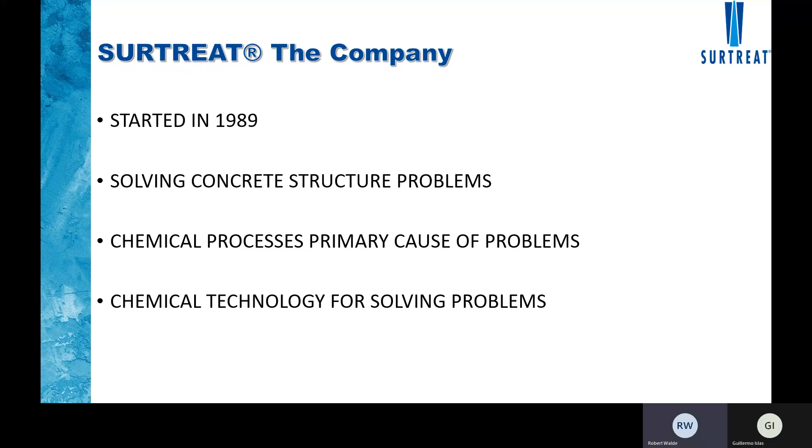So we realized that we needed to use chemical technology to solve these underlying problems and then incorporate the chemical solutions with the classic fixes, such as carbon fiber reinforcement, which we do with one of our associate companies, and even now the parent of Surtreat, Coordinated Systems Consulting, which is one of the leaders in the reinforcement of concrete using carbon fiber reinforced polymer mats.

We developed a concept called total performance system. What do we mean by that? That means that we do other things than just deliver product. What we do, we first take a look at the problem, as we see it normally in its physical form, cracks in the concrete falling off the surface, exposing rusty rebar. And we use this information to then dig deeper and determine what is the underlying cause of the damage. Is it alkali-silica reaction, rebar corrosion, freeze-thaw damage?

And to verify the degree and type of problem, we do testing. We're one of the only companies that actually does on-site testing as well as laboratory performance measurements. Just about all of our data on the performance of our products have been acquired on site where we're doing work on actual projects, measuring concrete strength, measuring the rate of corrosion on the reinforcing steel, and characterizing the problem, where we then can prescribe a specific solution for the underlying chemical cause of the problem.

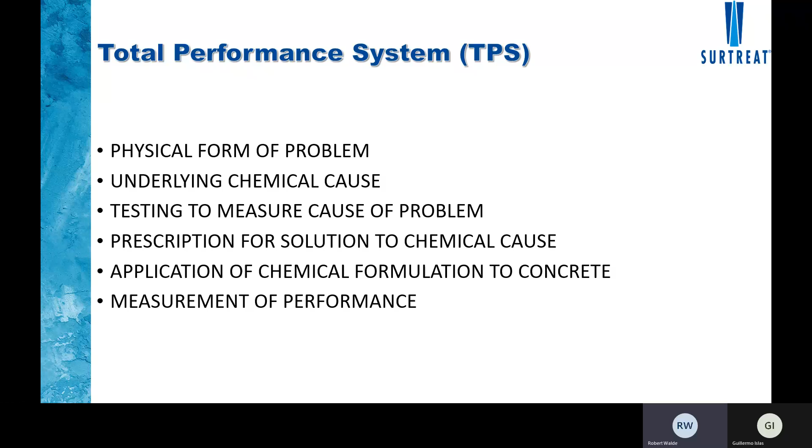Go apply that chemical formulation to the concrete to correct the problem, and then follow up with measurements before and after application to verify that we have significantly reduced the impact of that problem, such that repair work that is now done will have a long life. What we're really doing here is extending the life of structures.

Now here's just a few of the kinds of problems we solve and some of the products that we use. Rebar corrosion. You see we have several products that are corrosion inhibitors. TPS2 is a surface applied corrosion inhibitor that migrates in the ionic phase. It's a very powerful anodic inhibitor.

TPS12 is a vapor phase migratory inhibitor. It's both anodic and cathodic. You're all familiar with a battery, the positive, negative pole. The positive pole, this is where electricity is coming from, or rebar steel corroding, losing electrons, is the anodic site. So TPS2 is a very powerful anodic inhibitor. TPS12 functions both in the anodic and cathodic states.

And 15 is similar to 12, but is designed to be added to fresh concrete mix and be there as a latent corrosion inhibitor. TPS2 and 4 are concrete strength builders. We increase the compressive strength, the tensile yield strength, and the flexural strength.

TPS2 is our multifunction product, which we have designed to do three things: rebar corrosion, concrete strength improvement, and porosity reduction. You need to reduce porosity to keep air, moisture, and corrosion-causing salts out of the concrete. TPS4 we use if we want to maximize strength building and porosity reduction, and all of those properties can be enhanced by the application of Repel WB, a very powerful, long-lasting water repellent.

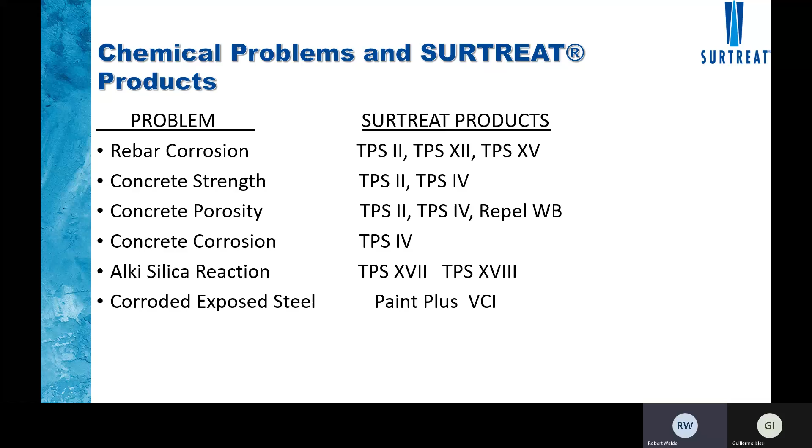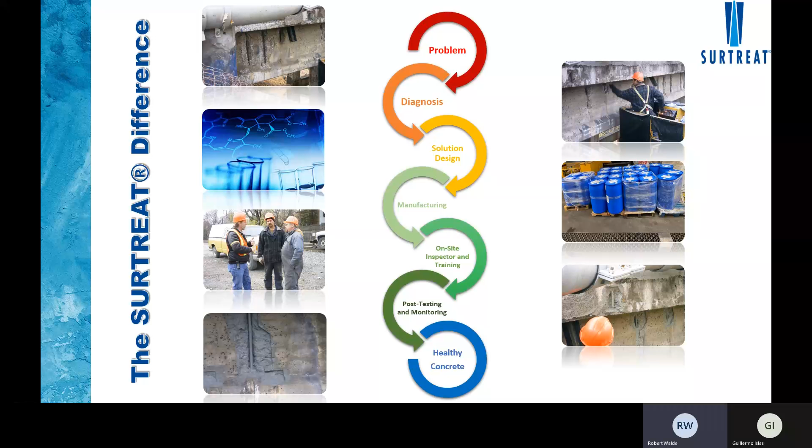And then we have pre and post application testing to verify performance and deliver healthy concrete with the life of the structure extended. We see two pictures here. We're working on an old railroad bridge. You can see rusty rebar. We're applying corrosion inhibitors. And then in the lower right picture, we've applied one of our other products called Surcoat. It's a special coating that can be applied over the rusty rebar after the application of TPS2, which gives it a long-lasting cover. And it greatly reduces the very high cost of doing repairs back to the original surface conformity.

Now, most of the benefit here is extending the life of the structure, which is a significant economic advantage. The more time you get out of a structure, the longer you are getting value from the original investment. But beyond that, we want to extend that life at minimal cost. We can apply the products initially, and many of them we see over 30 years of continuous performance, such as parking garages that were treated 30 years ago and continue in service without any maintenance work done during that period of time.

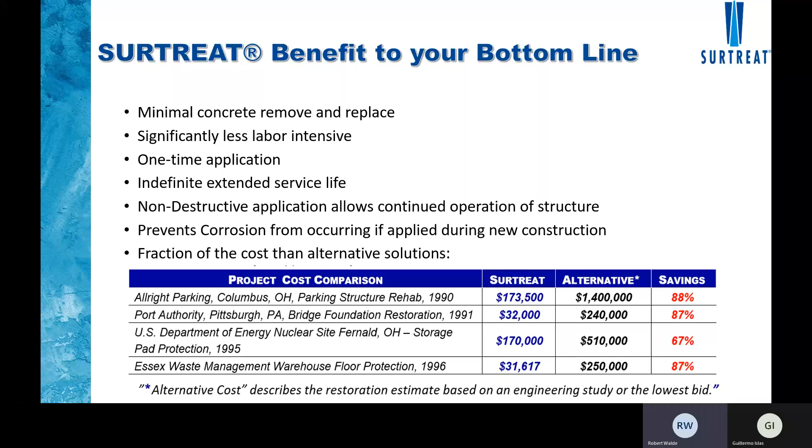The most important thing we're doing is inhibiting corrosion, which can be done whether it's a new or an old structure. And you can see below, we have several projects here, and we show the alternative cost of solving the problem, and then what it costs to solve the problem using Surtreat. Parking was corrosion. We can see we saved 88%. Port Authority was a bridge foundation. We were able to salvage the foundation without having to remove it and rebuild it. Department of Energy, sealing concrete at nuclear sites to inhibit contamination. And Essex Waste, stabilizing the floor such that waste spills would not be damaging the concrete or causing contamination.

Now, we work with many other organizations to verify and specify the use of our products, one of which is the International Concrete Repair Institute, of which I have been a member for many years, and worked with them for over 10 years with members from many other companies, as you can see, and consulting firms, to develop a guide for the application of surface-applied migratory corrosion inhibitors. This guide has been published and is available, and we can make it available to you.

It specifies the use and application of 3 types of corrosion inhibitors: anodic, cathodic, and mixed or ambiodic. Surtreat makes and delivers all 3 types of these inhibitors. TPS2 is an anodic inhibitor. TPS12 is an ambiodic, or both anodic and cathodic, and Repel WB is a pure cathodic inhibitor.

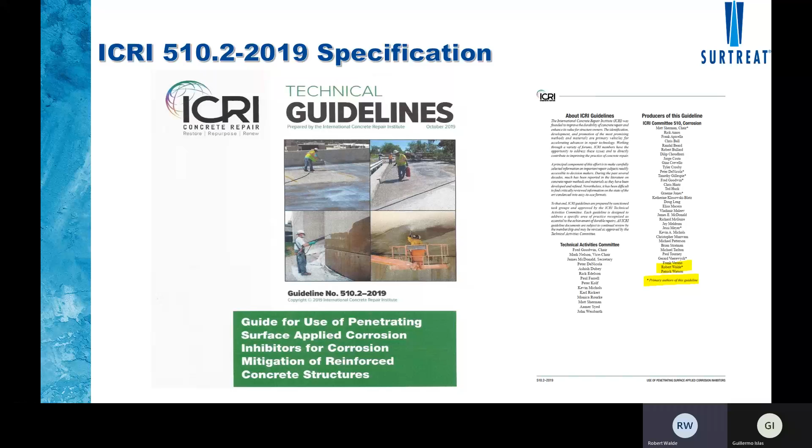The significance of the Surtreat products, and particularly TPS2, is that it inhibits the anodic site, which is where all of the steel is being oxidized and converted into rust. And as we'll see later, rebar corrosion is not uniform, but it's taking place at anodic hotspots, such that most of the damage is occurring there.

Another significant partner has been the U.S. Army Corps of Engineers and the Naval Facilities Engineering Command. Working together with these organizations, we conducted a project in Okinawa over 12 years ago, where we applied the Surtreat corrosion inhibiting, strength building and porosity reducing products to concrete at 2 military bases, one at a port in Naha and at concrete located at the Kadena Air Force Base.

Most of these structures were built back in the 1950s during the Korean War. And with time, carbon dioxide in the air and salts from the environment had penetrated the concrete and caused corrosion. We treated the concrete and measured corrosion rates, strength, and porosity before application. And then over time, the Corps of Engineers and NAVFAC sponsored other independent consulting companies to go back and continue to measure these properties. And what we found is that over a 10-year period, the corrosion rates continue to be reduced by 80% from what they were prior to the first application.

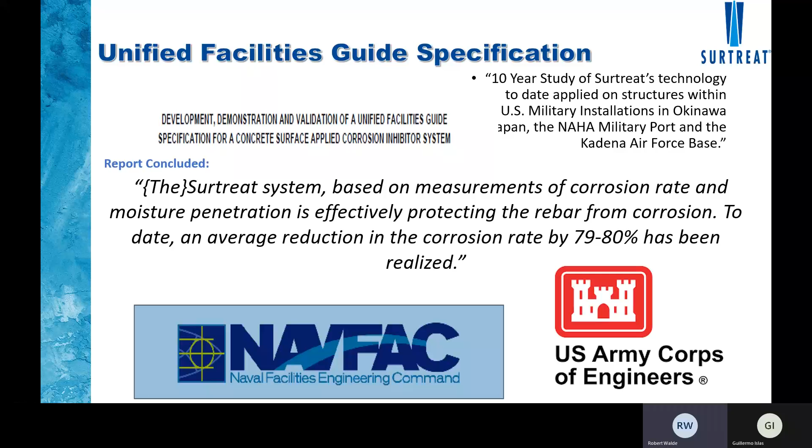And we also determined that the strength of the concrete had been increased by about 1,000 psi, and the rate of water penetration had been taken to 0. And these properties continued to prevail to today. And we've now been asked to come back and treat more concrete at the Kadena Air Force Base, which will be done as soon as the coronavirus allows people to get back to work there.

Here again, we just see a little more information about the nature of the corrosion problem. As you can see in the words here, new concrete has a high alkalinity. It's this high alkalinity that causes a stabilization of the surface of the reinforcing steel, inhibiting corrosion. But over time, the alkalinity drops, which is measured by what we call pH, a way of measuring the degree of acidity and alkalinity. As carbon dioxide in the air penetrates the concrete, it reduces the pH, and chlorides and other acids penetrate, putting the rebar surface into a corrosion active state.

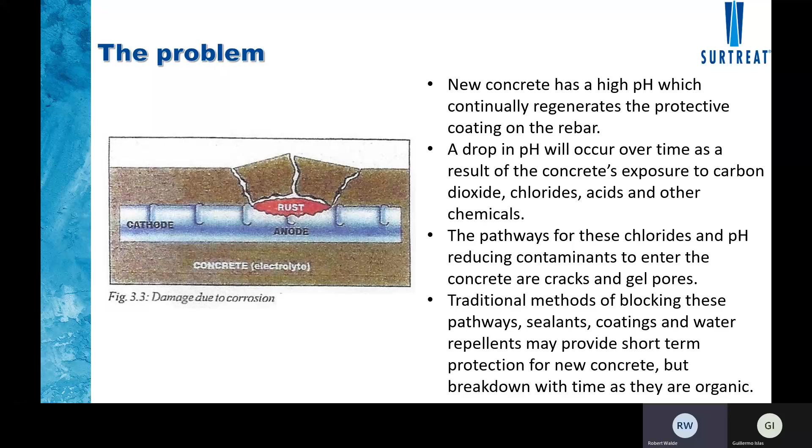And what happens, as you can see, the rust forms, and rust occupies about 6 times the volume of steel because oxygen is being added to the steel. It expands and puts pressure on the surrounding concrete, causing delamination and spalling. And when the concrete then spalls away, we find damage to the concrete, which is usually the first reason that owners of structures call us to do anything.

Now, if you're going to want to do something with rebar corrosion, you have to be able to measure the corrosion rate. And this can be done by several methods. One is the direct method, where you're actually measuring the flow of current from the anodic to the cathodic site. And there's an ASTM standard for that, G109. And this was the process that was used by NASA back in the early 1990s to originally work with Surtreat to vet our corrosion inhibitors.

They made these measurements and determined that the active ingredients in TPS2 and 12 functioned to inhibit corrosion, and were very powerful corrosion inhibitors, and that the TPS2 active ingredient was in fact an anodic inhibitor. Now, if the rebar is buried in the concrete, you cannot make connections to rebar in the anodic and the cathodic states in a micro cell condition. That means they're both in the same little block of concrete.

But you have to measure the corrosion rate through indirect methods, which is polarization resistance. By measuring polarization resistance and putting that into a simple direct corrosion current measurement, where I equals corrosion current, V equals the over voltage, and PR the polarization resistance, we measure corrosion current. And we have an instrument called Galvapulse, which does that in a single measurement cycle.

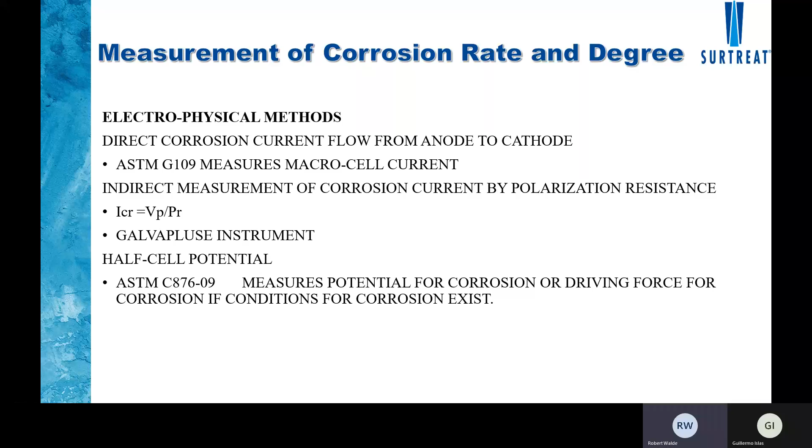Here we see the Galvapulse instrument in action. What we do, we connect it to a piece of rebar, as we can see the rusty rebar with the connection. Then we have a sensing probe, which sends an electrical impulse into the rebar and measures the polarization resistance as it polarizes and depolarizes due to the electric current.

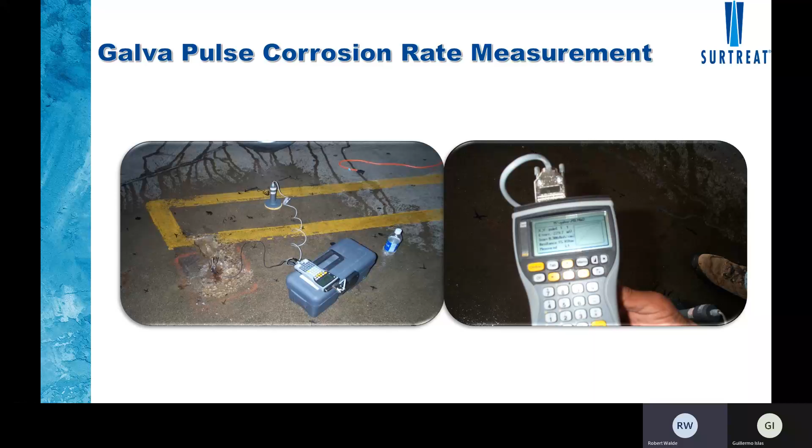The polarization resistance is automatically measured in the software embedded in the handheld device, which then runs calculations to show the corrosion current, the half-cell potential, and the resistance of the concrete, which is important because as the concrete resistance goes up, corrosion current is less likely to flow and have corrosion occur. We use this device to make all of our before and after corrosion rate measurements.

Here's a little example. This is probably one of the most important things we're going to talk about today, how we actually go out and make application of our corrosion inhibitors in an actual structure, in this case, decks of a parking garage. And what we did, before we did anything, we went and mapped out 26 points over the rebar mat on the deck of the garage. And we made corrosion rate measurements there.

We then applied our two corrosion inhibitors. We applied TPS-12, the vapor phase inhibitor, at a rate of 150 square feet per gallon, which is the standard method we use for measuring application rates. We next applied TPS-2 at 200 square feet per gallon. We then waited 6.5 months and went back and redid these measurements at the 26 points using the Galvapulse.

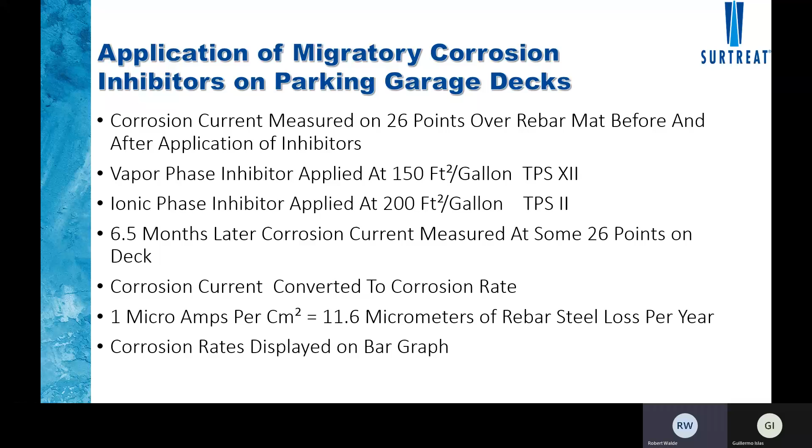And what we're able to do is we take the corrosion rate, which is measured in microamps per square centimeter, and 1 microamp per square centimeter equals 11.6 micrometers of rebar steel lost per year, which is the real corrosion rate. And we can see these rates where we're measuring the before, which is in red, and the after treatment in blue. This shows two very important things. One, that the corrosion rate is not uniform, but we can see where we have these corrosion hotspots.

In spots starting at 18 on up through 26, while 1 through 15, we're staying pretty much below 50 micrometers per year. But then we have hot spots going all the way up to 400 micrometers per year. And it's this area where we had the maximum loss of steel and damage. The important thing to see here is that through the application of TPS-2, we've quenched these corrosion hotspots.

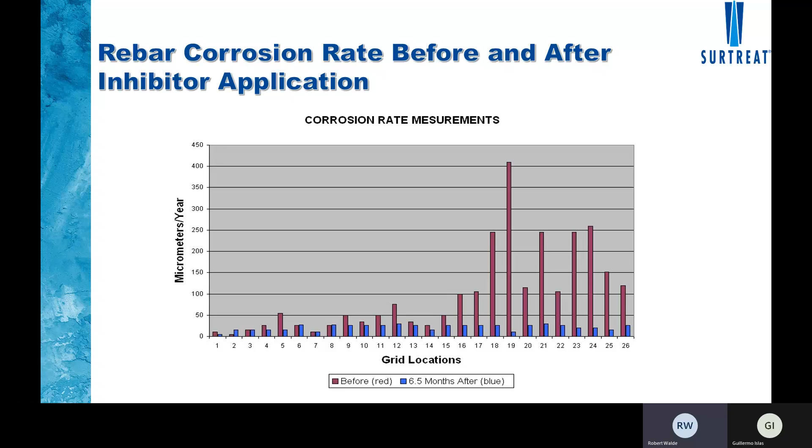The other classic methods that are used for inhibiting corrosion, which use cathodic protection, only drop the average rate of corrosion, but don't kill off the corrosion hotspots. They just reduce them, but not to the extent that TPS-2 can. But you can see how by inhibiting the corrosion, we've dropped the corrosion rate down.

And what's the significance of this now with life extension, which is the main thing we're really selling here at Surtreat? We're selling the extension of life of concrete structures at minimum cost today and into the future. That's what we sell.

Now, in measuring how we extend life, we have to make certain assumptions for calculations. In this case, we assume that the rebar at time zero was 20 millimeters, and that once we had lost 20% of the steel in certain sections of the rebar, which would be 4 millimeters of steel, we are at a critical structural point. We can design an equation where we can measure the time it takes to reach that point of the loss of 4 millimeters of steel at a given corrosion rate.

So we see T equals the diameter loss divided by, and this is a correction factor, 2 times 10 to the minus 3. What we're doing is we're correcting for corrosion, for loss of steel under corrosion rate in micrometers to millimeters, and from radius to diameter. And where R is the corrosion rate at given time, and K is a factor that takes into account the fact that corrosion rate is not even, and it takes into account those corrosion hotspots in our calculations.

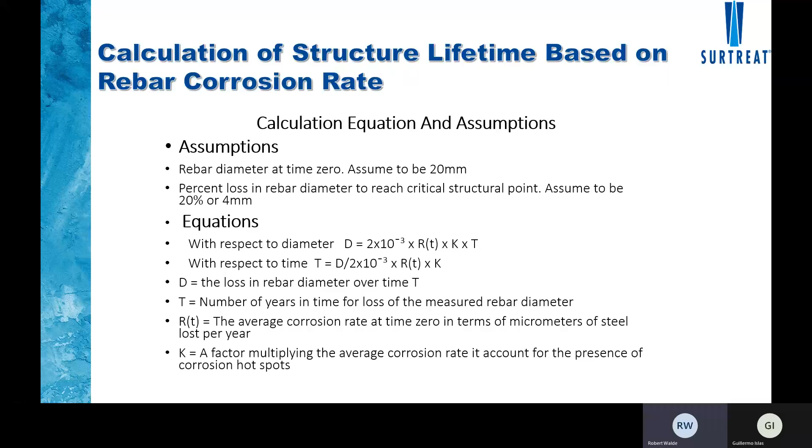So here we find that the original corrosion rate was 100 micrometers per year, and after treatment, the average rate dropped to 28, but the 5 highest corrosion rate points averaged at around 250 micrometers per year, such that the hot spots were corroding at 2.5 times the rate of the average. So that gives us a K factor of 2.5.

So now we see our calculation here. We have T equals 4 millimeters of steel lost, times 100 micrometers per year, times the K factor of 2.5. And this shows that within 8 years, we would see damage. And this is typically what's going on in parking garages. Every 10 years, they come back, do repair work, fix these spots where the hot spots were. 10 years later, guess what? They're back again, rebuilding the garage in 5 to 10 square foot sections every 10 years.

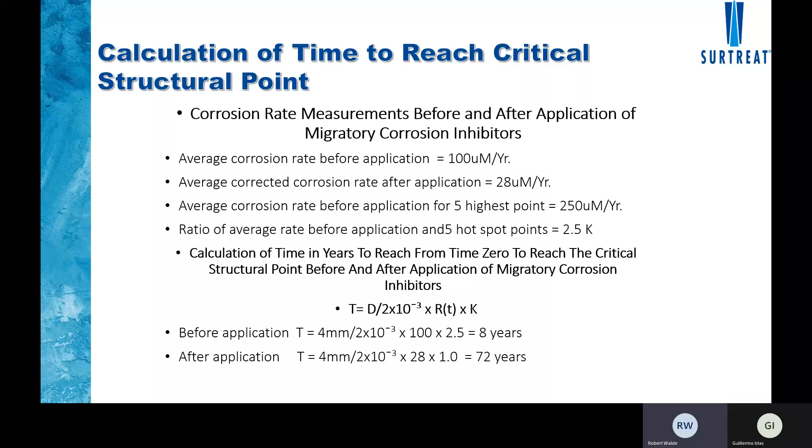After application, we've killed the hot spots. We've reduced the average rate, so it's going to be 72 years before any possible maintenance work might be done. So we've significantly extended the life of the garage, maybe even beyond its useful life, as many times old garages are torn down just to make room, like it was for the garage in Columbus, Ohio, for more valuable use of the space.

Here we see some pictures. Now we're getting into some specifics about parking garages. Here we see a picture of the work we did on the parking garage in Columbus, Ohio. You see the picture below, we're applying Surtreat. In this case, on concrete that was in very serious physical condition, where it had been scarified to remove old asphalt coating. It was crumbling. Here we're applying TPS4 at a very high concentration, stabilizing this concrete surface.

Here we are in Memphis, Tennessee, where we had concrete that was suffering damage. We're up on the roof. Here we treated the roof, took up the old coatings. Another contractor put down a hot rubber membrane on the roof, and then another contractor replaced the concrete, putting this garage back into service.

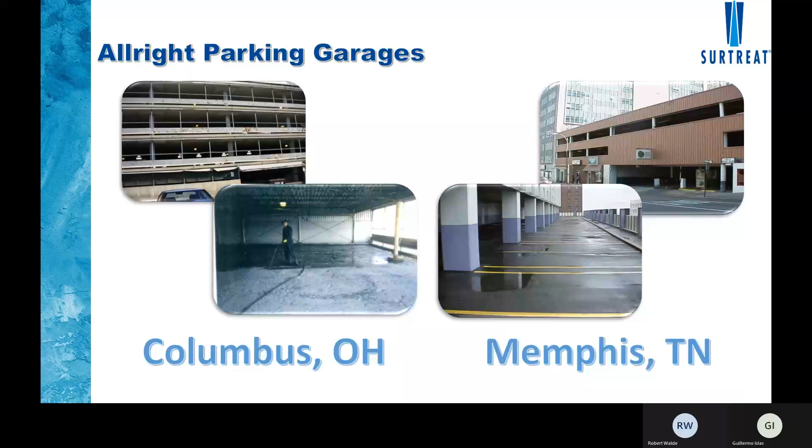Here we see a very interesting project, one in Pittsburgh, a new construction, West Penn Hospital parking. It was built back in 1990, and through someone who was on their board, he said, look, we got this new garage and we have Surtreat. I recommend that you have Surtreat treat the garage and we'll never have to do any repair work on it.

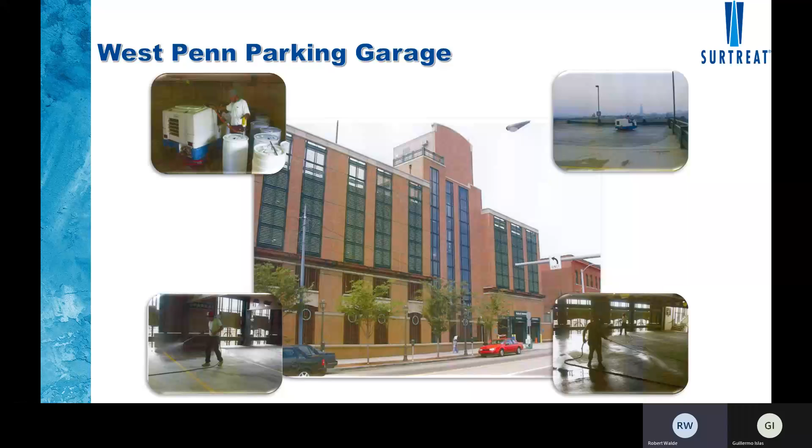Well, he was able to get them to agree to that, made the funds available, we treated it, and now, over 30 years later, that garage in Pittsburgh, we go back and inspect it, there's not one area of that deck that has ever had to be repaired. And it's been exposed to the Pittsburgh environment where every winter cars are dragging in de-icing salts, wanting to put that concrete into a corrosion active state.

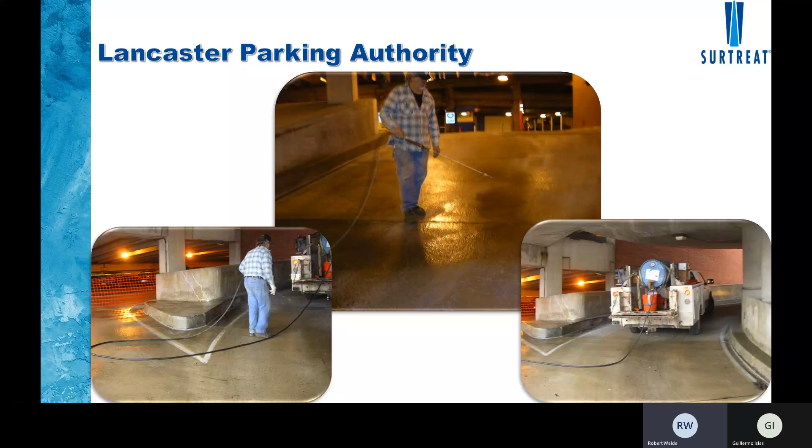Here we are, Lancaster Parking Authority, a project we did years ago on the ramps. Stabilized the ramps, treated them, repaired them, brought them back into service. Since then, we've done other parking garages in this same area in Columbus, Ohio, Lancaster, and Harrisburg. We've done well over 100 parking garage projects. Here we are at Harrisburg.

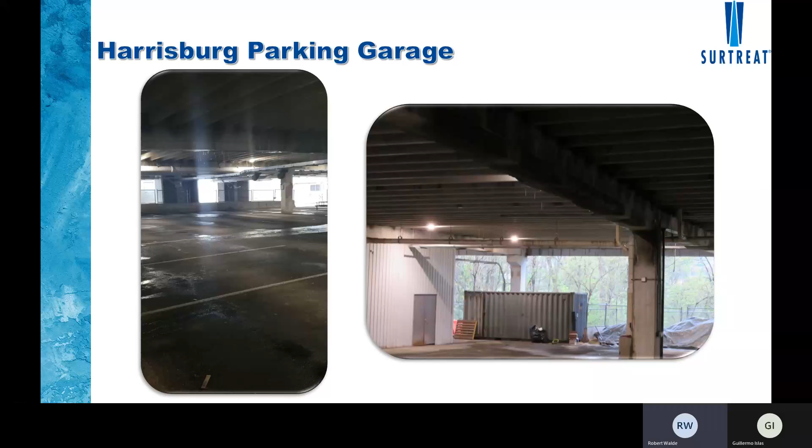Here's a significant one. We had problems with concrete, and we have a little video here where we're going through the garage, treating it. We can see we have damage to the ceilings and whatnot. But here we have another picture of this garage. What happened here, we had damage to the beam ends. And you can see damage to the center parts of the beam. Concrete was lost.

Well, the engineer for Harrisburg Parking Authority was alarmed by this problem. And he said, look, you've got to reinforce and fix these beam ends because the major cause of damage to parking structures is shear failure from the deck. So we came in and we inhibited the corrosion, repaired the concrete, brought it back to original conformation, and then reinforced it with carbon fiber polymer impregnated mats. This work was done by our parent company, Coordinated Systems Consulting.

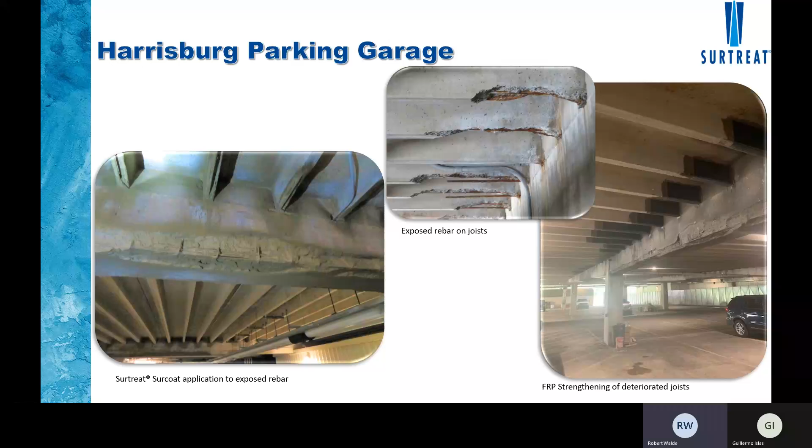And once that was done, the engineer said, yes, we can put this garage back into service. We can now park cars up on that top deck. And we then went on and along the beams here, he said, well, no, you don't have to do that. Just inhibit the corrosion. And there we treated the surface with Surcoat to prevent damage and bring it back to original appearance.

Here we are, Miller Parking. Now what you can see here, see this top deck, look at all this repair that was done here. The whole deck, almost 50% of this deck has been replaced. We came in, treated that whole deck with Surtreat, and to the best of our knowledge this was done probably a good 15 to 20 years ago. They've not had to go back and do any further repair work.

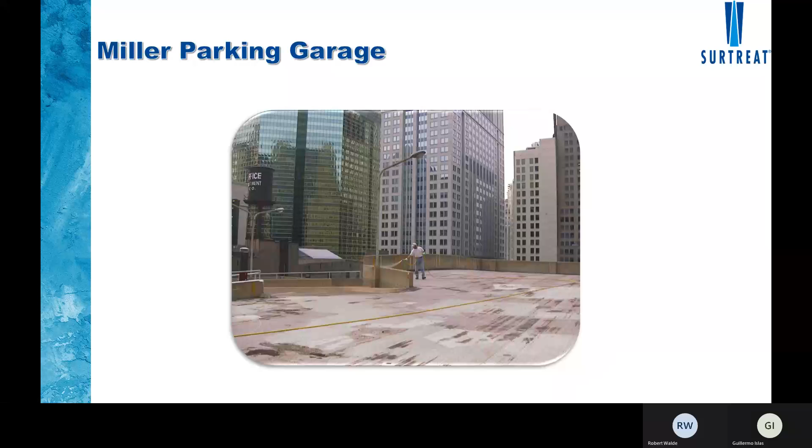Torpedo Factory, this is one of our most recent projects. Here, they had brought in a consultant. The consultant came in and said, "Oh my goodness, we did a chain drag. You got delamination here and there." Talked him into doing all these repairs, and then he said, "Well, you got this coating here. It's probably no good. You got to take it up and replace it." Well, that was really going to cost money.

Well, one of the members of the board who owned the top deck of this garage, a condominium called the Top Torpedo Factory Condominiums, got in touch with Surtreat and said, "Look, can you guys come here, take a look at this, tell me what's going on?" So I went there. I fortunately live here in Virginia, so I could get to the garage very quickly. And as soon as I saw it, and I went around and tested, I said, all these repairs were unnecessary.

What's happening when they did the chain drag? They're just measuring the difference in the thickness of this coating. There was no corrosion taking place. We did porosity measurements using our method, a RILEM tube. It had zero porosity. It was a very strong, non-porous coating. We made corrosion rate measurements. There was no rebar corrosion. We measured the chlorides. There were no chlorides. They'd spent all this money on these repairs.

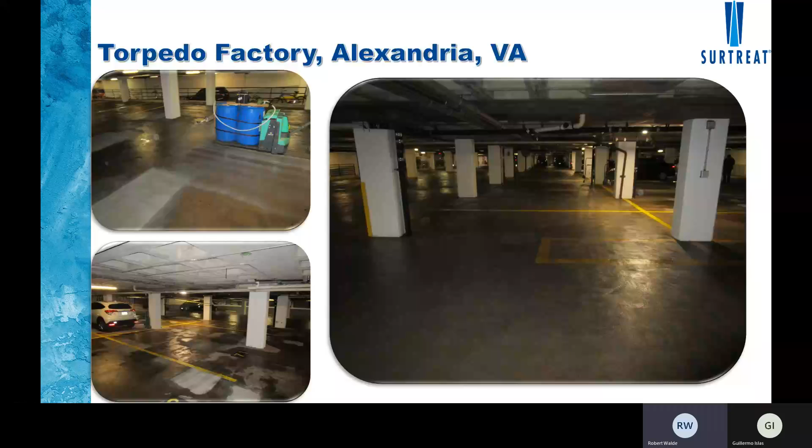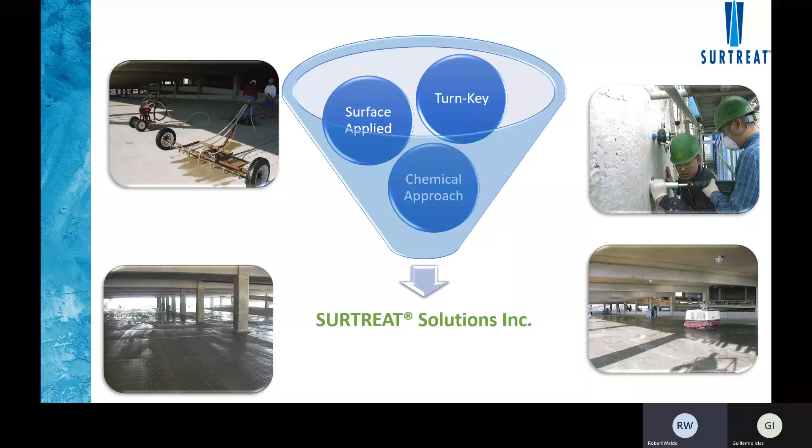So here we are. We can do turnkey projects, or we can deliver technical consulting and product to anybody's contractor, apply to the surface, solve the chemical problems, and deliver the Surtreat solution, extending the life of people's structures going into the future, saving money.